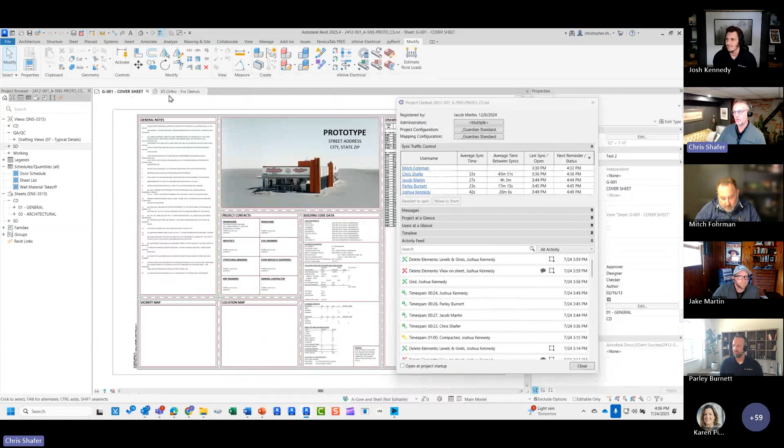So we first need to answer, what is Project Central? Project Central is a command center for BIM managers and digital practice leaders who want transparency into their Revit models without leaving Revit. It provides model performance data, user behavior, and project activity right there, live, so you can keep up to date with what's happening in your models. A couple of tips here. One, it sits on top of Revit. You can still move this off to the side and continue to work in Revit, so most teams will actually have this on a second monitor so they can keep up to speed.

The other thing I want to point out as a little tip is this button in the lower left-hand corner, open at project startup. So again, I'll ask everyone to press this. Every time you open a model, Project Central pops up, and then you have access to that data. Just a good little reminder, making it easier so you can access your data as quickly as possible.

So with that being said, we're going to go ahead and start diving into the individual sections of Project Central, and we're going to start with Sync Traffic Control. So Parley, if you wouldn't mind taking over and presenting STC.

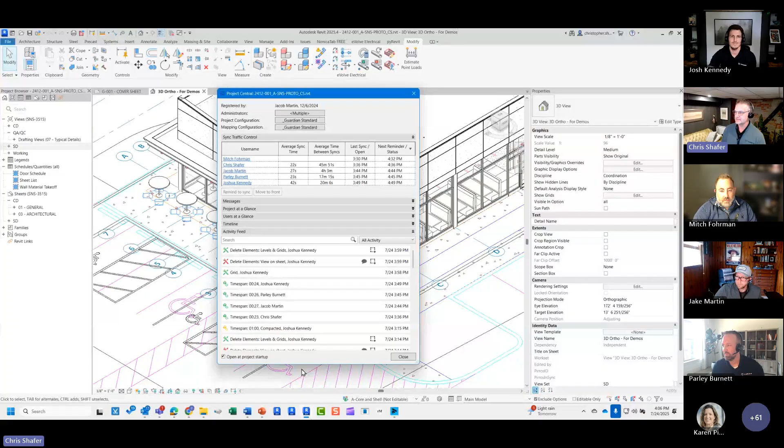Absolutely. Thank you, Chris. Just one quick thought on the Project Central dialogue as a whole. Coming from the product side of things, many of you are familiar with how much data Guardian does capture. And when we thought about Project Central, the goal was really to bring in only the most relevant data for Revit itself. That data, just the bite-sized bits that are actionable, insightful, things you can work on right from within the model.

So I hope that's obvious today as we go through each part of this, especially the sync traffic control. I'm really excited that I get to share this part of Project Central with everybody, especially because this is the kind of thing that is really relevant for all of your users, in my opinion. And anybody's going to appreciate having this kind of insight.

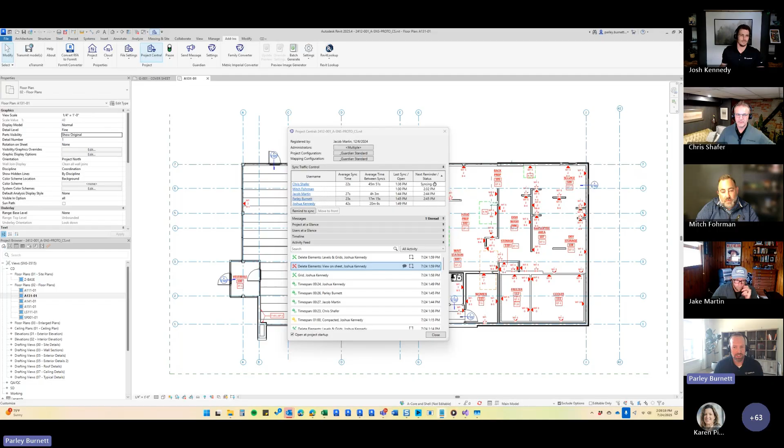But we can see that Josh is syncing right now. And if anybody else was to try to sync, like Chris is currently, he has to be pending until Josh's sync finishes. So this is a really great way for a team to have that kind of insight. We suggest that everybody actually keep this open. Chris already mentioned that this can be floating while you're working, and it can be enabled for your team members to just always have open on the side.

As we talk with teams every day, it seems that model issues tend to arise or boil down to something related to synchronization habits, or poor behavior, or something went wrong with the syncing, and it's very complicated, a lot of different aspects to it. But we find that when users are synchronizing regularly, not on top of each other, things tend to work a lot better. So if you're an administrator within the system, you have a few different controls here. I just want to point out a few different aspects of this.

If you have reminders turned on, you'll see a scheduled time for each user's next reminder to pop up for them. It's completely customizable. And I just want to clarify, that does not necessarily represent the queue. Sometimes I think users get the idea that this is a queue. This is really just a reminder queue. What we consider the true queue is when you have one person synchronizing and multiple users behind them that would show as pending. And that's all going to show up at the top of this.

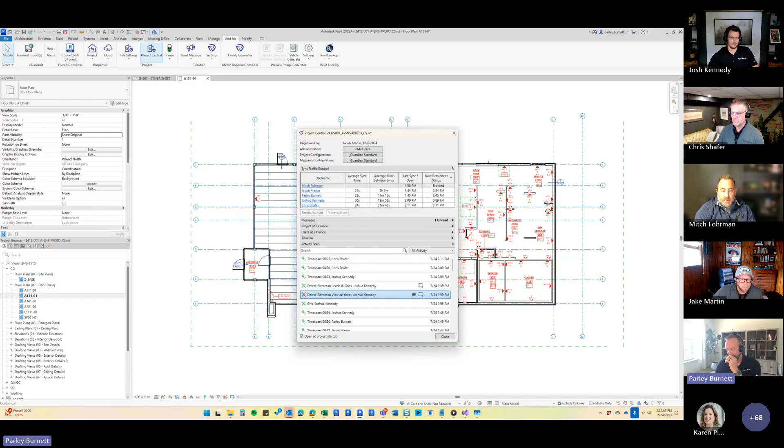Thank you, Parley. Yeah, Guardian Messages is a great way to get important messages to your team directly within Revit. No emails, no Teams, no Slack messages, and importantly, no context switching either. A Guardian admin can easily communicate updates firm-wide on a project-by-project basis, or even per model, ensuring that the right people get the right messages quickly and right where they work.

When someone's working on a project, it can be really hard to get critical information to them when it's time sensitive. We've heard about situations where ACC goes down and BIM leaders want to urgently tell their team to save their work, or there's a deadline tomorrow. We want to remind everybody to sync and to close the model before they leave for the day. So it's been a lot of fun for us to hear how firms are utilizing this feature. I've given a couple of examples of how some of our clients are using Guardian Messages today.

Love to hear from you guys. If anybody has any unique or different ways that you guys are using Guardian Messages today, please pop them in the chat. And I'll kick it to Josh if you would speak a little bit about projects at a glance.

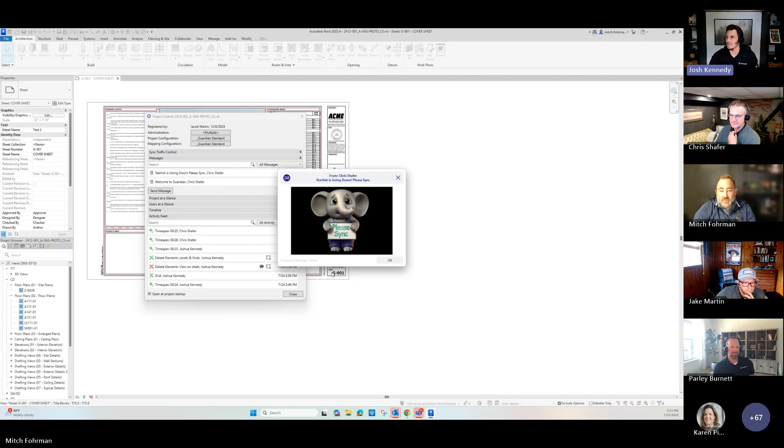Yes, thank you, Mitch. As I'm sharing my screen, I've got a message coming right in from Chris. I'm guessing sent it out to the whole project team here. I'll sync after I'm done here, Chris. Thanks.

Yeah, so I'll talk about project at a glance. I'll also talk about users at a glance. I'll hide the activity feed and leave that excitement for Jake. Project at a glance is a fun part of this tool. It's really the only piece where Guardian, when this is opened, is actively querying the model and really looking for areas that this model can be improved.

So depending on what Guardian finds, that's what's going to surface here. Right? Things like groups with limited usage, in-place families, right? And we provide kind of quick links to take you to these things right in that view in this model. Another tip here is if you are trying to rename a model group or anything like that, you can actually do that right here as well. So an active interface.

One thing that I'll say about this as well is I've seen firms use this in a really fun way, right? You can control which parts of Project Central you want to give to all of your team. Like Parley mentioned, sync traffic control is a really popular, probably the most popular that we see of admins granting to the rest of the users.

But we've seen Project at a Glance be used in a really cool way to kind of empower users to help with some of this cleanup work, right? They can come in here, start to find some things. So it's not just maybe you doing all that cleanup work, but you have some power users who are helping you out along the way.

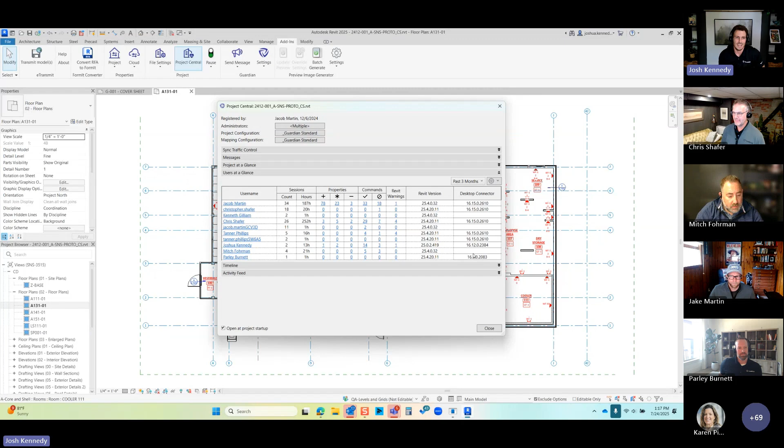I think the two most popular columns here, though, tend to be the different Revit minor versions and desktop connector that people are running. I talk to a lot of teams every day. A lot of people tell me they spend a lot of time tracking down just which versions of software people have, and they really appreciate being able to see this, especially if someone calls the Revit hotline or their phone, says, I have a problem, I'm trying to sync, I don't know what's going on. Just making sure everybody's on the same desktop connector and minor version of Revit can go a long way.

Yeah, like Mitch said, if there's other ways that you're using those two sections, would love to hear about them in the chat. Other than that, I will pass it over to Jake to talk about the timeline. Well, thanks, Josh.

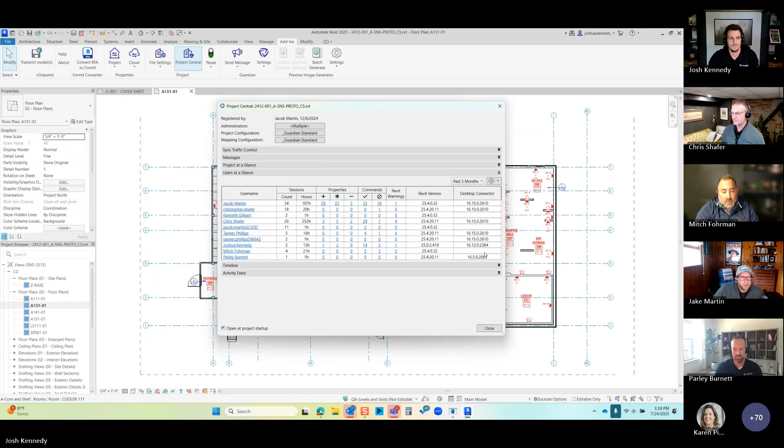Yeah, so timeline, awesome feature, one of my favorites. The timeline gives admins clear visual insights into key model performance, such as file size, project session duration, time required to open the file, time required to sync by users, and warnings.

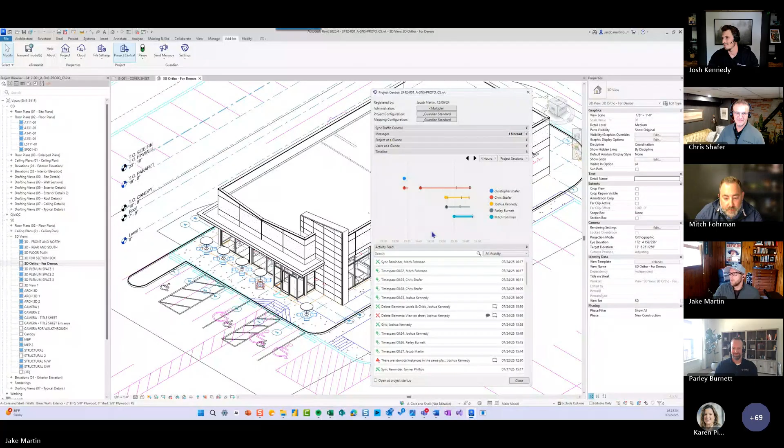The project session duration is my absolute favorite part of this. It shows you a color-coded system for each user who's been in the model, depending on the time frame that you're looking at. So in this case, the last 4 hours, we've got everybody here on the call in the model. The punctuated vertical black dotted line, that's how frequently people are syncing. So if you hover over those, you can see a little bit of information on that sync, how long it took, when it happened.

If I select one of these, it's actually going to filter the activity feed. Where's Josh at? I know he's hard at work. Clear that breadcrumb. There we go. So during this session, we've got Josh here actually creating some warnings, which is a great segue here to the activity feed.

So activity feed delivers real-time transaction level visibility into how users are interacting with your models. It makes it easy to spot certain things as they emerge, lets you investigate root causes, ensures standards are followed, and helps you get in front of problems before they exist. This occurs live, so as somebody does anything in a model without syncing, it's going to appear within the activity feed.

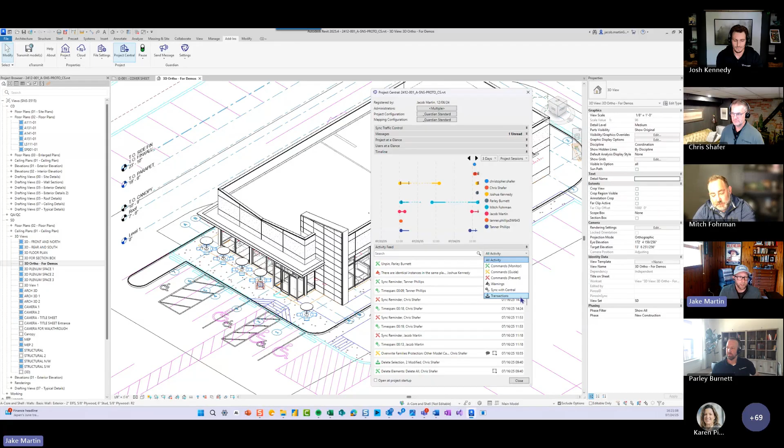So particularly for transactions, the larger the transaction, the warmer the color. So a transaction that's red might be something to investigate if I were looking at this and trying to see why file size spiked for some reason. Curious though, from the crowd, what's the largest transaction you may have encountered within Project Central, if you've noticed that before?

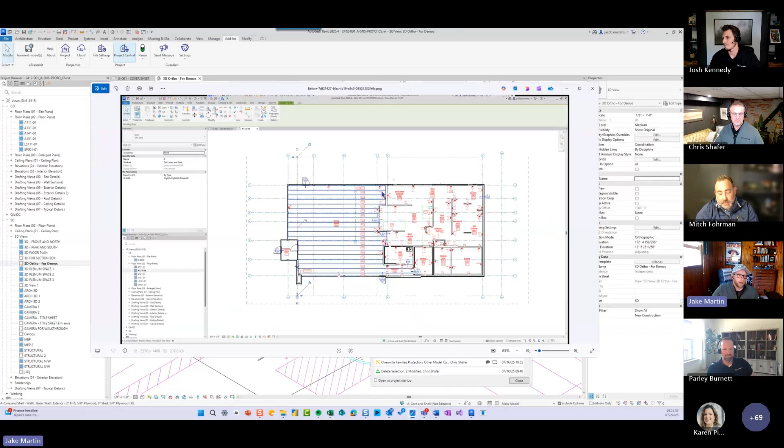You can see we've got Parley actively modeling, unpinning stuff. We've got screenshots for anything that captures a before and after, or anytime a screenshot might be applicable. Pro tip here is that you can actually download these screenshots to a larger format so you can zoom in and out and investigate a little bit closer.

Cool. With that, Chris, I'll pass it back to you. Awesome. Thanks, Jake.

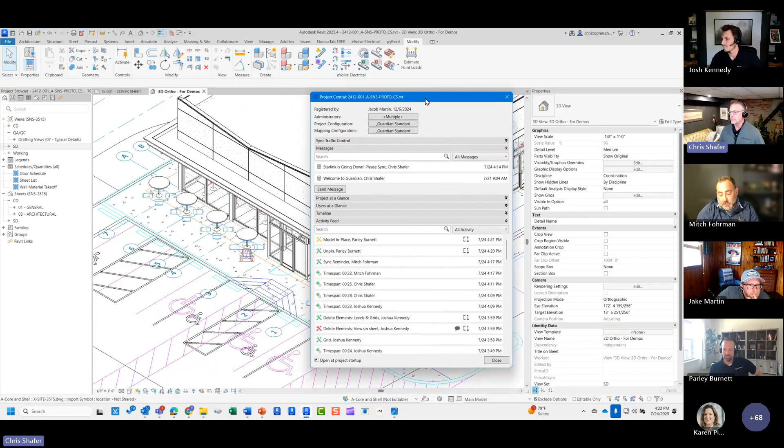One of the things that we talked about earlier is the ability to share Project Central with all of your end users. In previous versions of Guardian, Project Central was only available to admins. And I think it was last fall with the start of 3.2 that we opened it up to all end users. Now, we also understand that all the information that's provided in this may not be something that you want to share with all your Revit end users. So we've set up a way to customize all this as usual.

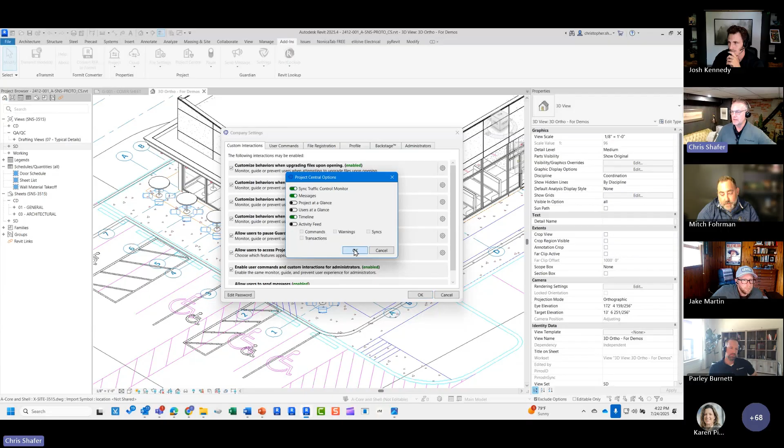So if we go back over here to the Guardian tab and go under company settings, here you have allow users to access Project Central. And by customizing this, you can turn certain sections on or off depending on how you want your end users to interact with Project Central. So I'm going to try this live. I'm going to go ahead and hit okay, and I'm going to log out of Guardian as an administrator.

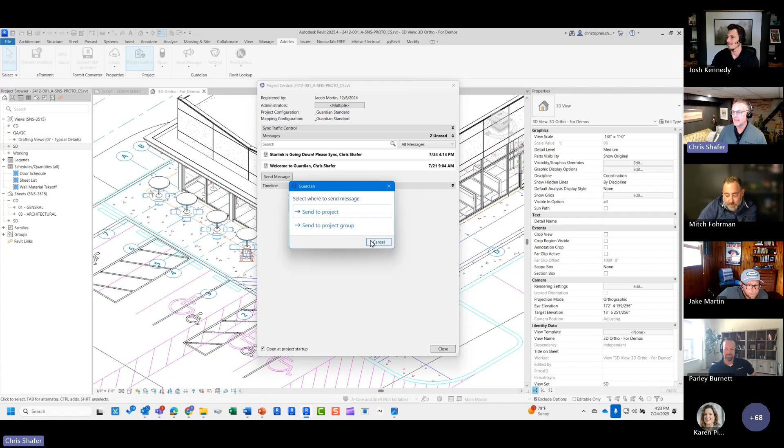And now I close this. And let's go back over to Project Central. Now you can see that I still have access to sync traffic control. I have access to the messages. And even as an end user, I have the ability to send messages to the project or the project group itself. And since we've turned it on, I, as the end user, can keep up to date with my model

performance. All the things that Jake has gone over, whether it's the file size or sync times, and to be able to kind of self-regulate a little bit here to say, oh, why is my sync time much worse than everyone else's? Maybe I'm working on Wi-Fi when everyone else is hardlined in. So those are always the little things, the little informations that you can provide to your end users so they can take on some of the responsibilities of getting better at their use of Revit.

So with that being said, I'd like to introduce Steve Bennett, and he's been using Project Central, and his end users have been utilizing Project Central for quite a long time now. So I would love for Steve to kind of give us a little tidbit about how he and his teams are using Project Central. Steve, if you can unmute yourself. Thanks for the intro, Chris. Can you hear me okay?

Yes, thank you. Excellent. Yeah, I would say that probably our number one use for Project Central is the sync traffic control and being able to either move people to the front of the reminder list or actually remind them so that their Revit will sync. Just last week, we had somebody forget to close out a model overnight. And in the morning, a couple people were having problems with the project and I wanted to run an audit. Revit wouldn't let me because that user had not synchronized with Central.

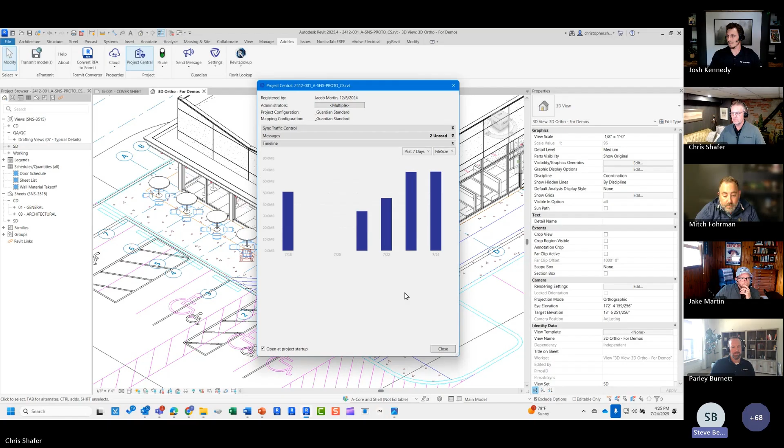So I opened up Project Central from the projects list without having to open the project, reminded them to sync, and then they were syncing within a couple minutes, and I was then able to progress forward with running an audit on the project. Probably the next most useful thing that users have found is the timeline and being able to see if a project is suddenly taking longer to sync or not, or to open.

We've come across in the past where a plugin was pushed out. It wasn't caught in testing that a plugin was causing a slowdown at Synchronize with Central. And so we were able to go into the timeline inside Project Central. We went back about a month, and sure enough, we could see the spike in the length of times it was taking people to synchronize with Central, and we were able to track back which plugin it was, roll it back, and then people were able to get on with their project work without having big slowdowns. Those are probably two of the biggest items that users are looking at, either users or project admins.

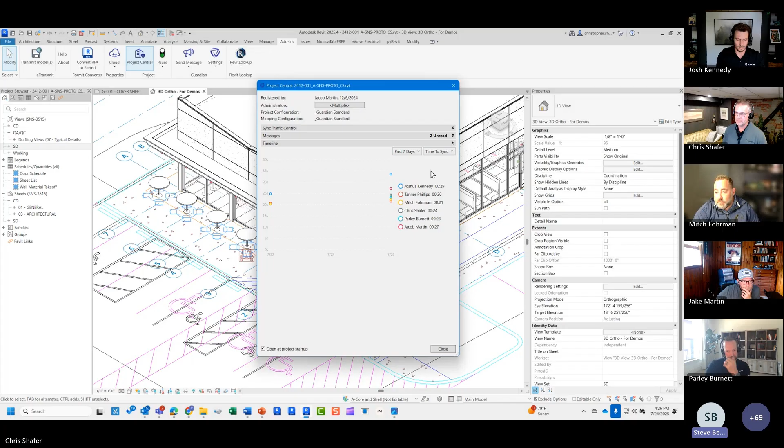And Steve, do you have the activity feed live for your users as well? I believe we do. Yes. So they could see that if they wanted to. I feel like a lot of times people are so focused and heads down on their project work, they sometimes may not always get into there to see it, but it's there if they need it. So if suddenly something goes missing, they could go back and look to see if perhaps something got deleted that was being tracked by Guardian. They'd be able to see the before and after screenshots to figure out what was deleted, who deleted it, and then go from there to try and backtrack getting that item back.

Nice, nice. And I'm just going to open up this for anyone. If you have any questions specifically for Steve, feel free to raise your hand, and we'll be more than happy to have Steve answer that for you. Hear from a real user firsthand.

Yeah, and I put into the chat too. You know, sync traffic control would be the number one feature I would implement today if I had to do it fresh. I think back in the day it was preventing CAD imports and model in place. But now, it's so fundamentally altered our ability to not get hung up on people syncing. We don't have to force relinquish from the cloud if it's a cloud project, and we're a lot happier with this.

That's awesome to hear. And have you, by any chance, seen that people sync more frequently and their sync times are actually getting faster now that you have sync traffic control? I haven't recently gone back to look at historical data over time to see if sync times have reduced, but I do know that we have less people stepping on each other's toes.

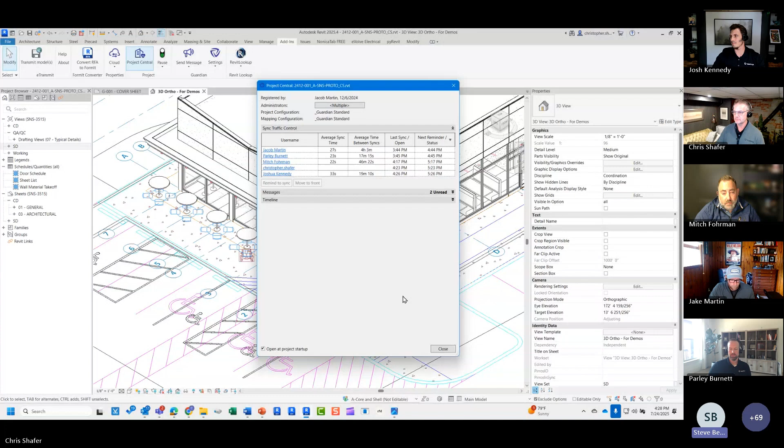We had a rather large project at one point, I think we had close to 18 people working on this large hospital project, and they were doing the Teams chat, and there were 2-3 people deep in a queue, and people were forgetting and stepping on each other's toes virtually with Sync with Central. When we implemented that, they didn't have to do it anymore. Guardian just handles that for that team now, and they're able to work on the project.

And if they need to get added to a queue, they add themselves to the Guardian queue, and then when their turn is up, it says, "Hey, it's ready. Let's go," and then they're set to go.

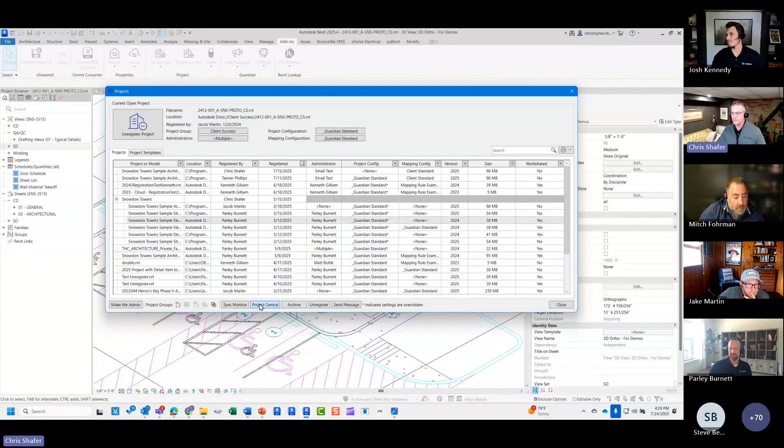All right, nice. One of the things that Steve had brought up here was the ability to open Project Central without the need to have the model open. So under the Registered Projects button, here you'll find all of your models. You come over here to click the model you're looking for and open Project Central. And then you can get that live information.

Obviously, no one is in this model, but you can see the activity, the timeline, and whatnot based off the model that you selected without actually, again, opening the model.

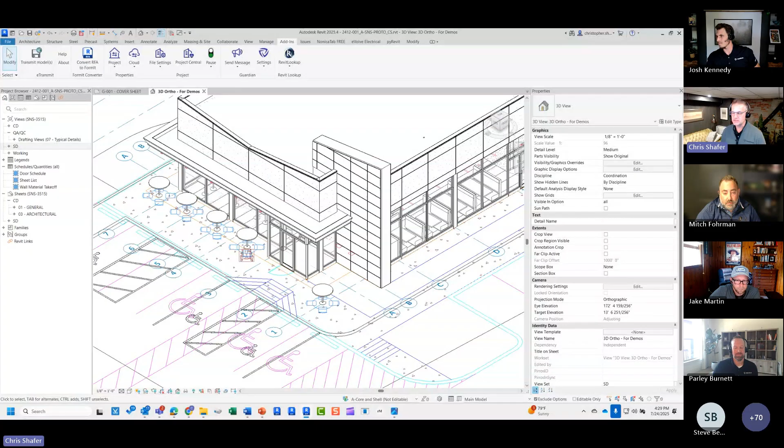All right. I saw that there were a few questions in the chat, but I just want to open it up. If anyone does have any questions, feel free to unmute yourself and ask away. One of the questions I did see, Jake, I know you tagged this one, but I want to answer this one live: Can you please show how to see who deletes something in Revit?

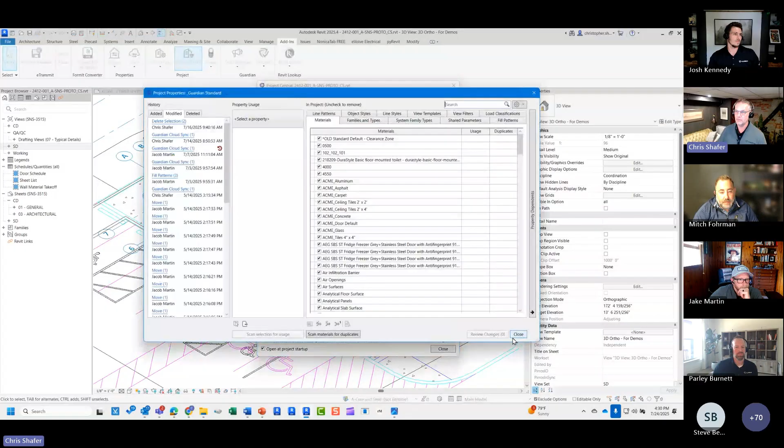Yeah, so I'm going to go ahead and launch Project Central here. Earlier today, I did delete something. Here's one way to see what was deleted. Actually, it's not the way I wanted to go. This is the one I actually wanted to click here, because we have a custom interaction set up for delete protections that looks at when particular elements are being deleted.

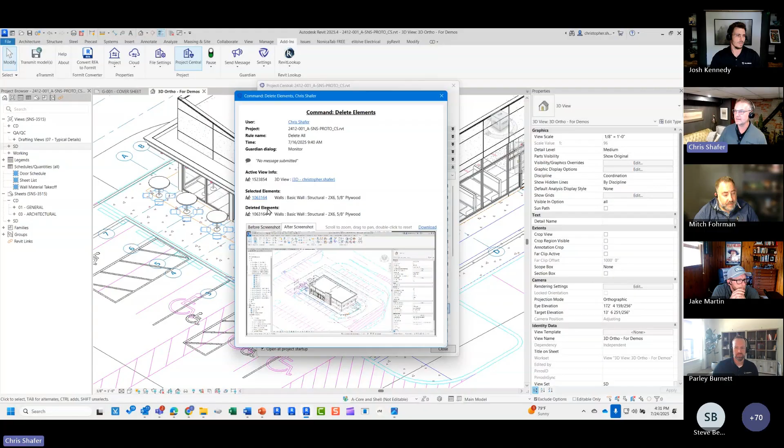This one was last week, where I was able to delete these selected walls. And again, here you have those before and after screenshots and also the element IDs. So you can quickly identify when and where things were deleted. Hopefully that answers your question, Jose.

I would also recommend checking out Guardian's website on delete protections, where we've provided a whole list of examples of the different rules you can create to monitor, guide, and protect certain elements from being deleted.

Hey, Chris, I was wondering if you wouldn't mind if I steal the screen from you and just show how you can access Project Central from the registered projects list. I don't think we showed that yet today. Actually, I just did. I think you were busy. Sorry, I missed that. I was answering a question. Yeah, no worries. I figured you're busy in the chat there. Yep, no problem.

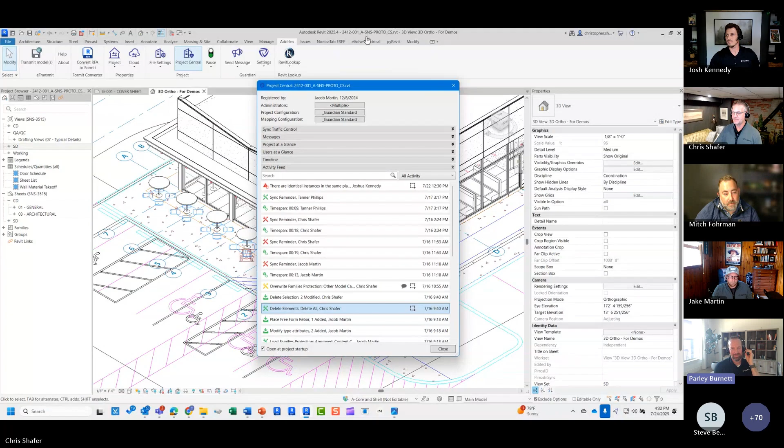And Parley, would you want to talk about some of the other things that we're working on along the lines of Project Central and data? Sure. Thanks, Chris. Always fun to talk about that. Project Central, like I said before, is really the home for actionable data, and we see a huge opportunity with Project Central to add more data to it, so you're going to see more data appear, but also in other areas as well.

Not just Project Central, but we're working on more in Power BI and elsewhere, ultimately trying to make the data even more actionable, much more obvious, very easy to act upon for the users. So we're excited to share more about that soon. That project at a glance portion that Josh was showing is an area that we'll be adding a lot to.